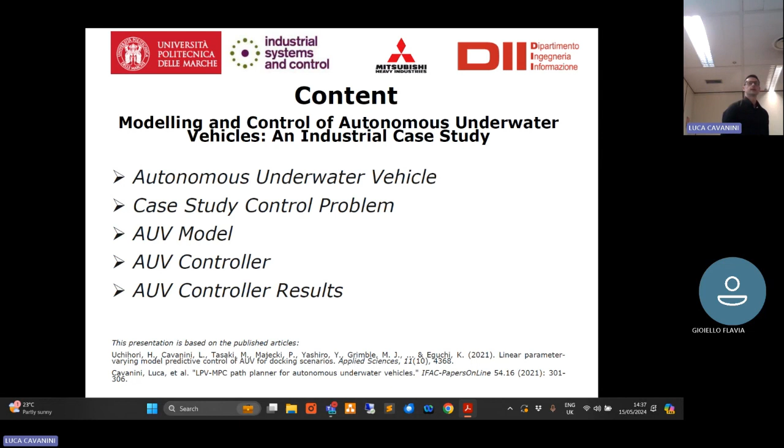This seminar is on the design of a control system for an AUV. This activity and the results and design I will present are related to work developed within Industrial System and Controls, a company in Glasgow, and Mitsubishi Heavy Industries. In our activity, the goal of our control problem is to develop a control system for an AUV aimed at performing a certain set of tasks autonomously in underwater scenarios. In particular, the vehicle shown below in this slide is used for evaluating the state of health of oil and gas tubes on the seafloor.

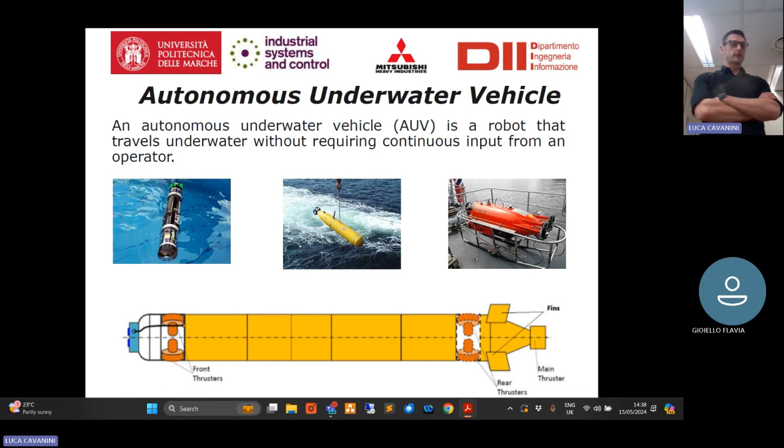This type of vehicle is used for developing and realizing different applications that require a high degree of autonomy of the robot. Our approach relates to the control problem that will be faced and discussed today: to develop this control system and a related path planner, a higher control system in the control system hierarchy, that will permit performing a particular task.

To move from the initial position to the ROV position, the vehicle will perform a set of maneuvers related to the capability to detect the position of the ROV with respect to the range of measurement of the sonar. The vehicle should correctly track the trajectory generated by the path planner to follow the different waypoints, and while moving through them, maintain the ROV, our goal position, within the angular range of the sonar.

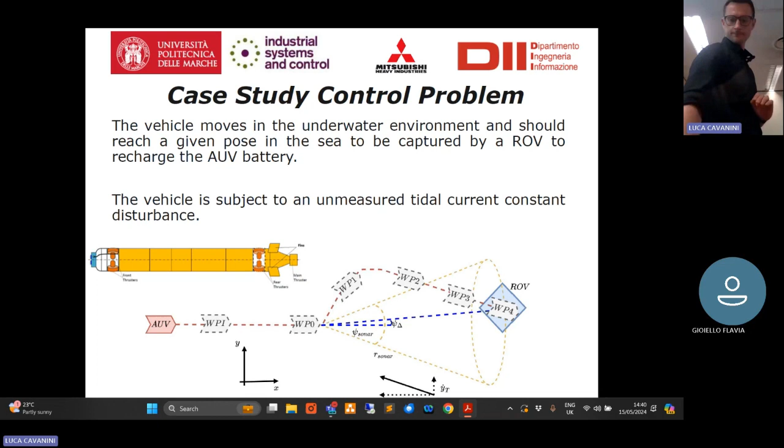So, to develop the control system aimed at driving our vehicle, we first need to study and develop a simulation model of our robot.

To develop the simulation model, we need to define three main aspects. The first is to define the reference frames characterizing our application. Then we need to model the dynamics of our system, exploiting the design framework for underwater vehicles proposed by Professor Fossen from the NTNU.

Finally, we will characterize the vehicle by including the dynamics model of our actuators, because as you have seen, our vehicle is equipped with several actuators, so it's redundant in some way, and we need to adjust the control action for different actuators to guarantee correct control performance while moving over the scenario.

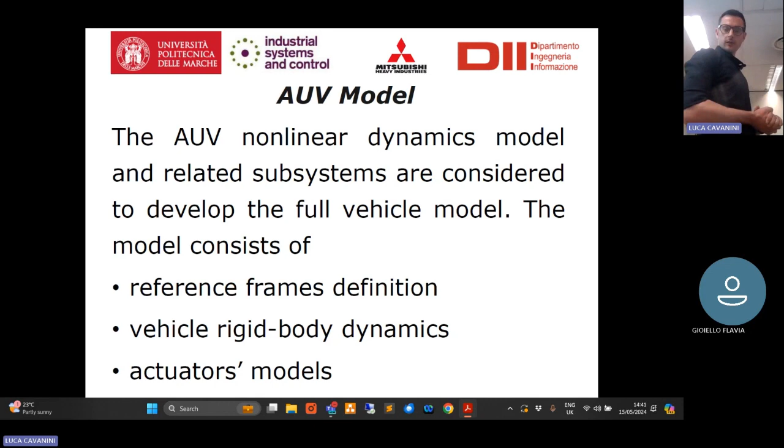So first of all, the reference frames. For marine applications, we use two reference frames. The first is the robot-based reference frame, the local reference frame used for representing angular and linear velocities of the robot. This reference frame, indicated here as the body-fixed reference frame, moves together with the robot and is related to the external reference frame by a transformation of coordinates.

The overall model of the system will merge the combination of the inertial reference frame and the local reference frame for correctly defining the pose and angular position of the robot with respect to the external one.

The signals we consider in both reference frames are the forward velocity of the robot, the lateral velocity, and the vertical velocity, with the z-axis oriented in the opposite direction with respect to the surface. The same analysis is performed for defining the external, or inertial, reference frame.

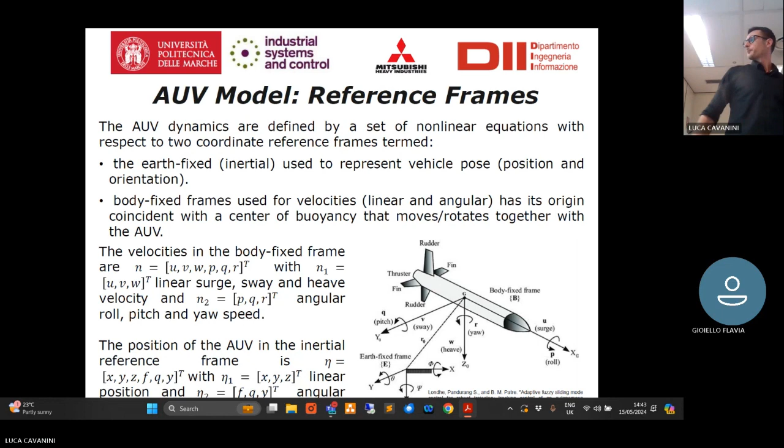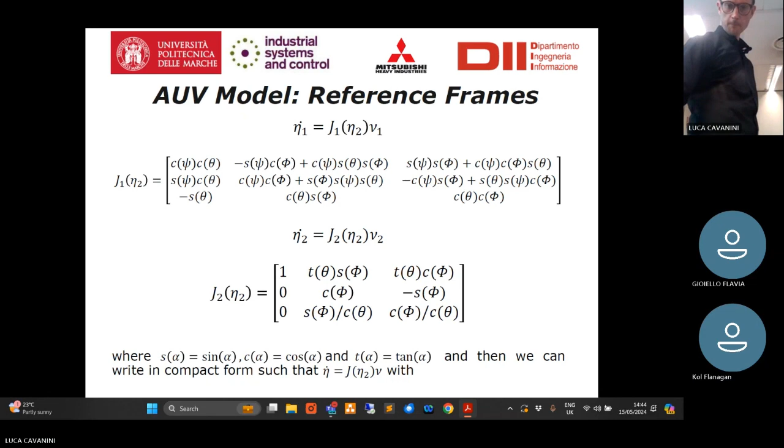This equation is characterized by the different effects we want to model to correctly represent the dynamics of our system. It includes the effect of restoring forces, which depend on the geometry of our vehicle, the added mass, strictly related to the underwater application we are considering, damping terms, Coriolis effects, and actuator forces and moments.

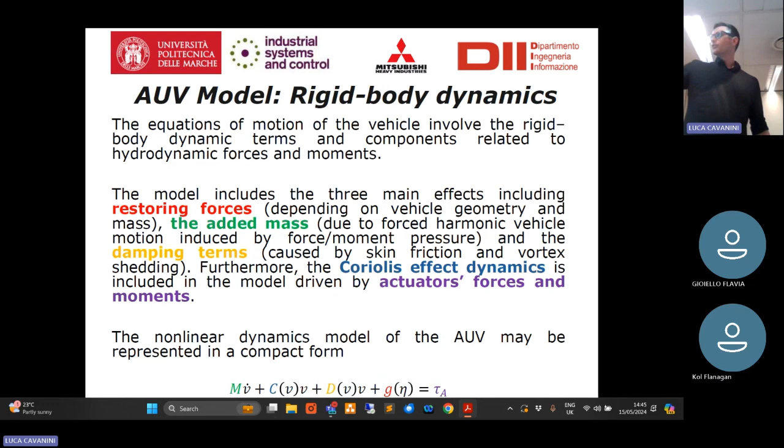This general rigid body equation is characterized by these components. M represents the mass matrix component of our equation, and this M is not only related to the mass of the vehicle, but also to the added mass, which we will discuss later.

C represents the Coriolis effects. D represents the damping effects affecting the vehicle. G corresponds to the restoring forces and moments, which includes both the gravity force that tends to move the vehicle to the seafloor, and the buoyancy that tends to move the vehicle to the surface.

As I said, we have the thrust expressed in terms of forces and moments, which is the set of actions we apply for driving the vehicle. And of course we have the set of state variables affecting each term, where v is the array of linear and angular velocities, and eta is the array of linear and angular positions.

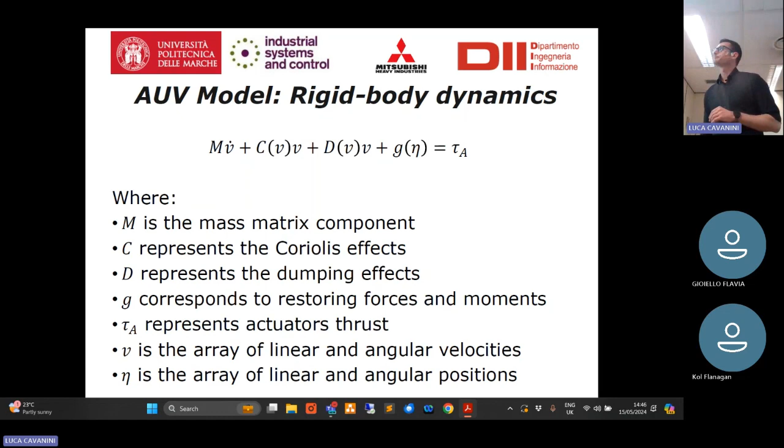First of all, the mass. The mass of underwater vehicles is characterized by two terms, following the modeling approach proposed by Professor Fossen. In this approach, we can consider the mass of the vehicle as a constant part due to the inertia of the system, so the mass of the system and its size, with respect to the center of gravity, where Rg is the position of the center of gravity of the vehicle.

This constant term is interesting for us from a control system point of view - the mass is the first term we are analyzing in the rigid body equation. It is composed of two terms: this first term is constant and is parameterized according to this representation, but it's also composed of another term indicated as MAM.

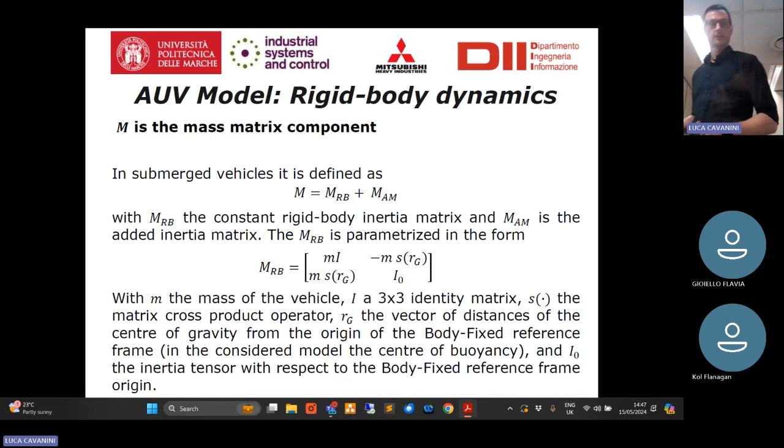This second term represents the added mass. It is the mass related to the displacement of the vehicle in the underwater scenario and to the water moved while the vehicle is moving.

To model the added mass, we can consider a set of coefficients that are typical in underwater applications and permit us to approximate the added mass by this set of constant coefficients, provided directly from, in this case, MHI for characterizing the system. So the first term characterizing the rigid body equation of our system is given by a set of constant elements.

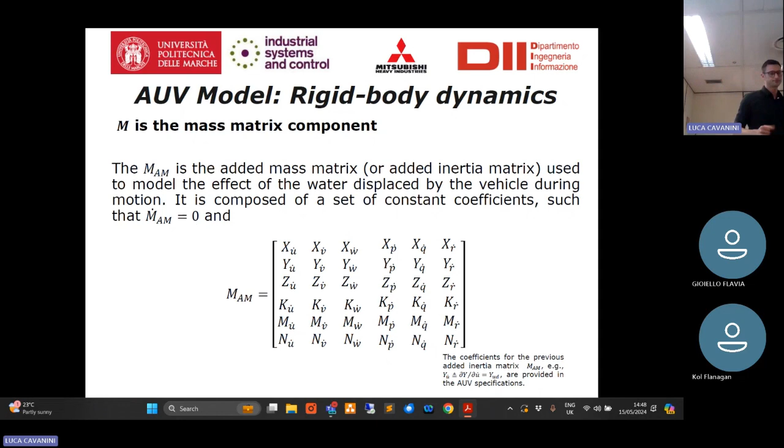The second term we are studying is the Coriolis effect. The Coriolis effect, as indicated in the previous slide, is a function of the velocities of our robot. So in this case, from a control system point of view, we are considering this C of V as a time-varying component affecting the dynamics of the system.

Also in this case, the Coriolis effect can be mapped in our model by considering two components: the Coriolis effect due to the nominal mass, and the Coriolis effect related to the added mass, as for the mass effect we have seen before. So we can model the Coriolis effect by considering these two components.

They are characterized by this skew symmetrical parameterization, and this will permit us to directly evaluate the degree of change of our C matrix with respect to the range of variation of our angular and linear speed.

An analysis like this, which permits us to evaluate the change of magnitude of the values of the Coriolis effect matrix, is useful because by evaluating the rate of change and the magnitude of this term, we can evaluate the required robustness of our control system.

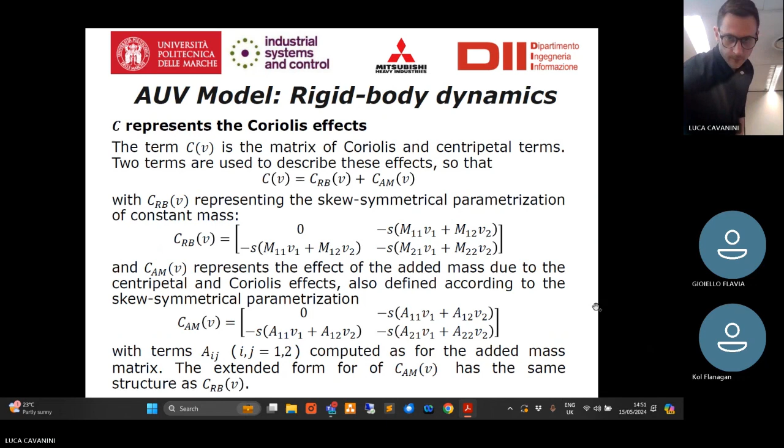Further, we have the damping effects. They are related to different effects affecting our vehicle in the underwater scenario. So in general, in marine vehicles, the damping effects are classified as potential damping, viscous damping, wave drift damping, vortex shedding, and lifting forces.

Now, certain of these components will be removed only because our vehicle is an underwater vehicle. For example, wave drift damping will be neglected in our analysis because it affects only surface vehicles.

So by the analysis and review of these different effects, based on the study of our control scenario, the damping effect will be modeled as indicated in this equation, by a set of constant terms that characterize the vehicle and are studied through finite element analysis of the hull, nonlinearly related to angular and linear velocities.

In particular, we can see that almost every term is related to the absolute value of the linear velocity times the value of the linear velocity. So these are nonlinear equations that we need to take care of and take into account while modeling the system.

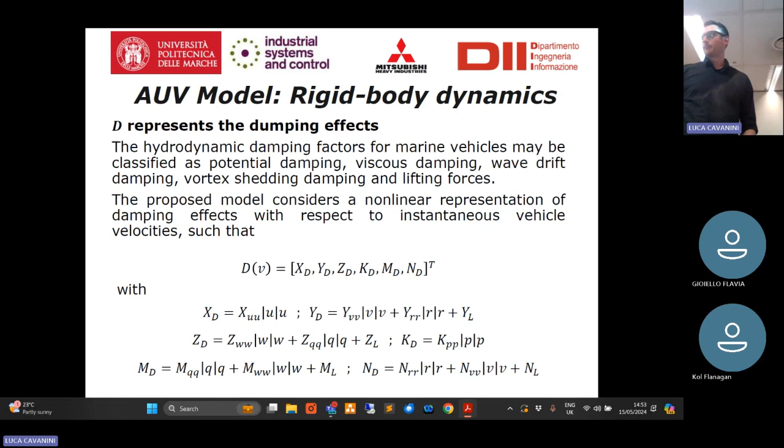Further, as I mentioned before, we have the restoring forces. Restoring forces are related to the mass of the vehicle that tends to move it toward the seafloor, and to the buoyancy that tends to move it toward the surface. Both these forces should be mapped within the vehicle model according to the position of the center of buoyancy and center of gravity of the vehicle.

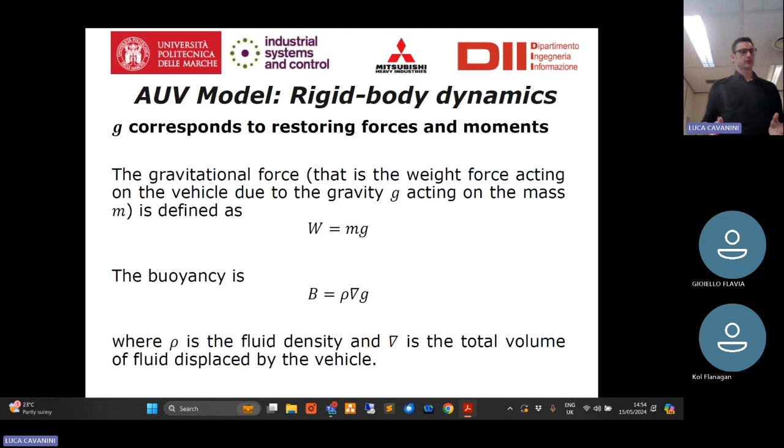This means that the center of gravity of the vehicle is related to the geometry and mass of the vehicle, and in general can differ from the center of buoyancy, because the center of buoyancy is also related to the geometry, the mass, and the distribution of mass of the vehicle—but in general, they cannot be coincident.

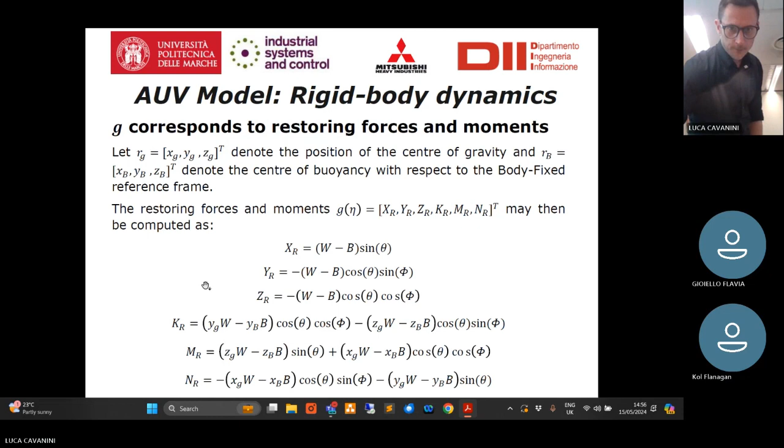So these are the four terms we are describing and modeling for emulating and studying the dynamics of our model. Now, our model should also be characterized considering the forces and moments that we define for controlling our robot.

Let's characterize the actuators to evaluate their dynamics and understand which kind of control system we need to develop, also taking into account nonlinearities and the size and position of these actuators with respect to the vessel hull.

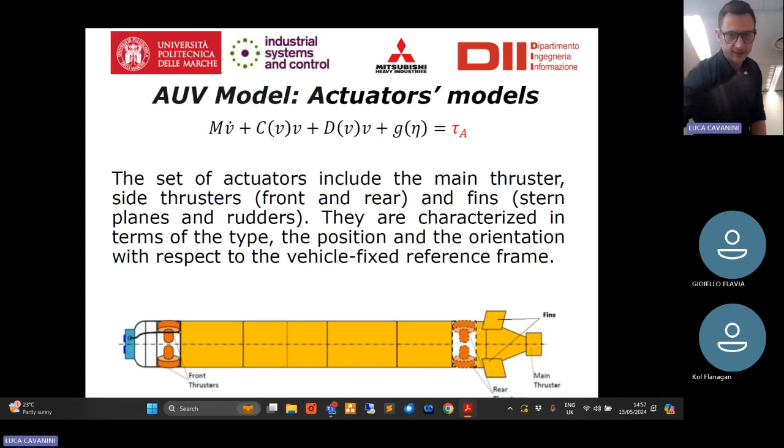First of all, the main thruster. As I said, the main thruster is placed at an extreme of the vehicle and is able to generate only forces for moving the vehicle in the forward direction. Our main thruster is characterized by this nonlinear equation describing its dynamics, with a dynamic part related to second order dynamics.

Because the thruster is for underwater application, the force generated by this thruster is also characterized by the water density, assumed constant in our application, and with respect to the control input.

Now, the control input of our thruster is limited to be within an upper bound and a lower bound, but it is also characterized by a dead zone around 0 with an offset of 400 RPM.

This is something we need to take care of while developing the control system, because the saturations and dead zone have effects on nonlinear dynamics. We need to take care to have a correct behavior.

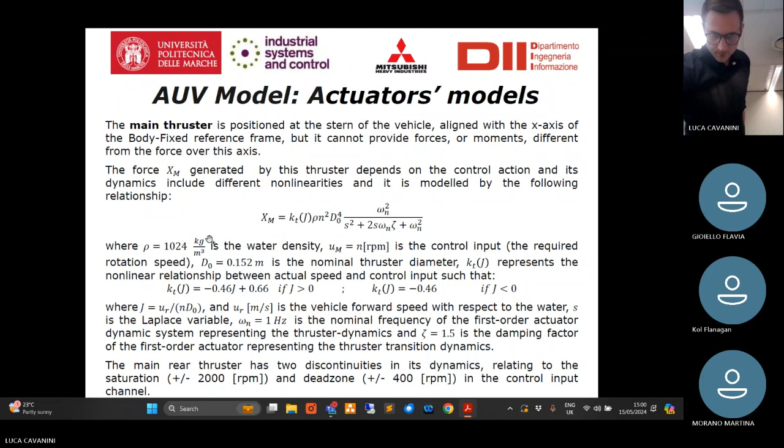Then we have fins. Fins are placed close to the main thruster, and the capability of each fin to generate a certain force and a certain moment with respect to the rigid body dynamics orientation is given by these equations.

As you can see, here you will not have the term related to the force generated with respect to the forward direction of the vehicle. This is because, due to their position on the hull, fins cannot generate a force over the forward direction of the robot. But they can be used in combination for generating different forces and moments over the other directions.

In particular, in this robot, we are able to control each fin, so each rudder and each stern plane, in combination but also individually. Here we have delta R1, delta R2 related to the angle of the rudders, and delta S1, delta S2 related to the angle of the stern planes.

An interesting aspect is related to the other effects characterizing forces and moments generated by fins, because when we drive these fins for generating a certain force or moment with respect to a certain axis, we will have also a part of the force generated that is not strictly related to the control signal driving the fins, so delta R and delta S, but related to the interaction between the fins and the environment.

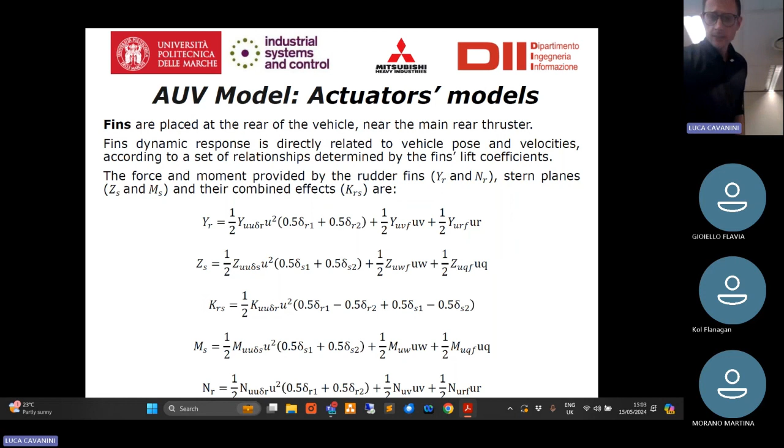This part of the force and moment generated due to the use of fins should be taken into account to correctly define the control action driving the fins for obtaining the expected forces and moments. We will see this during the control system design in a few slides.

As I said in the previous slide, we have seen forces and moments generated by fins, but fins are also characterized by a low pass dynamics. Each fin is driven as a second order system characterized by a natural frequency of 4 Hz and a damping factor of 0.7.

This means that when we define the control system for the rigid body, so for the vehicle, as we have done or will do for the main thruster, we need to also take care of the dynamics of the fins, because the effect of the change in angular position of each fin is not directly mapped into forces generated by fins, but is smoothed due to the presence of this second order dynamics characterizing the movement of the fins.

And of course, fins are also characterized by a maximum and minimum orientation. So the control action driving fins should be constrained to be between 30 and minus 30 degrees with respect to the zero position of each fin.

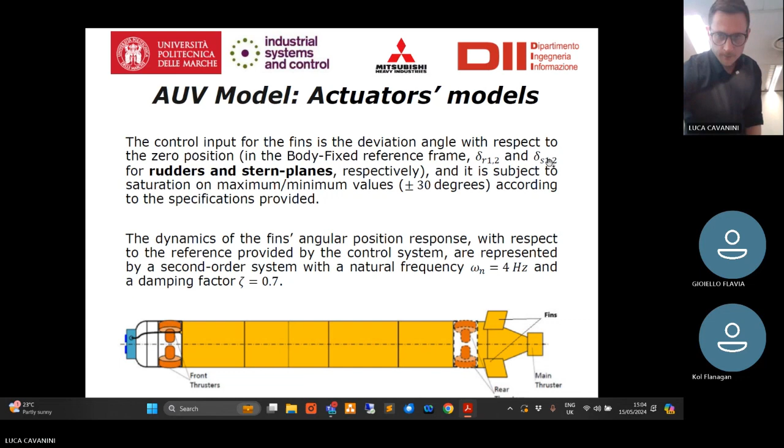As I said, we have also another set of actuators: the side thrusters. The side thrusters, characterized by specifications provided by MHI and to be used according to this specification, should be used only while the vehicle is moving at low speed, such that fins are not effective.

By using the side thruster, we are able to maintain a given position, a hovering position, in the underwater environment, or move over the environment with a limited forward speed, while guaranteeing the possibility to correctly maneuver the vehicle also when fins are not effective, because the speed is too low.

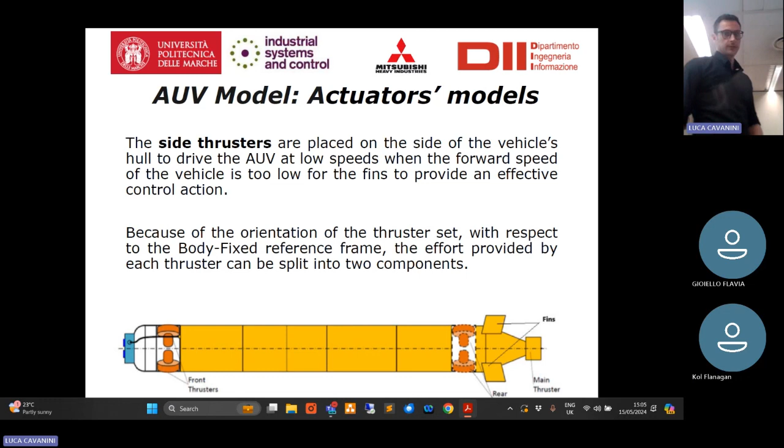The effect of different side thrusters should be mapped in the effective set of forces and moments generated by these thrusters. So here we have the so-termed allocation matrix that permits to consider which is the effect of

forces applied or generated really by each of the side thrusters with respect to its position on the vessel. Because of this, we can see the first row of this matrix is 0 because side thrusters cannot be used for generating a speed for moving in a forward direction of the robot. The second and the third row represent the capability of how we can map each force generated by each side thruster

into related forces used for moving on the lateral side or over the vertical direction of our robot. Whereas the last 3 rows indicate the capability to combine the forces generated by each side thruster to generate moments. Of course, they are related to the position of each thruster with respect to the center of mass of the vehicle. Because of this, we have this combination of d and minus d, and capital DF and minus capital DF and capital DR and minus capital DR.

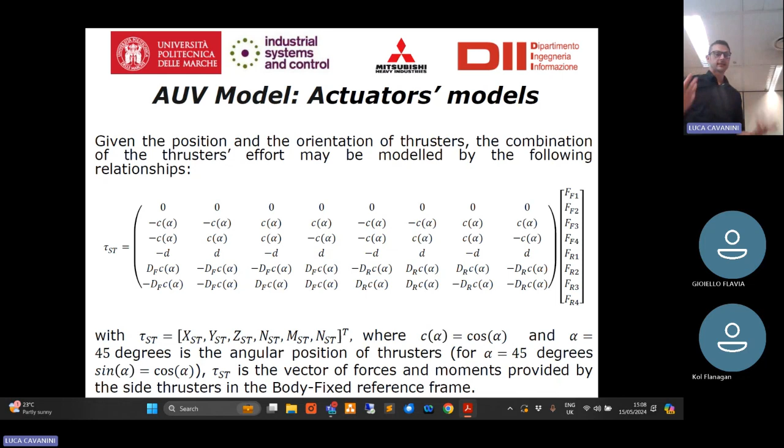But this equation permits to characterize the combination of forces generated by thrusters, but the thrusters again are dynamic systems and they are characterized by a certain dynamics. In fact, each thruster is characterized by a dynamic behavior given by the state space model. This is in continuous time.

This state space model is used as a filter for filtering the real thrust generated by each side thruster, where the real thrust, indicated with YT here, is computed with respect to the instantaneous value of the control signal driving the actuator, UT, and also the square of the control action. So again, also for this thruster, we have a nonlinear relationship we need to take care of while developing

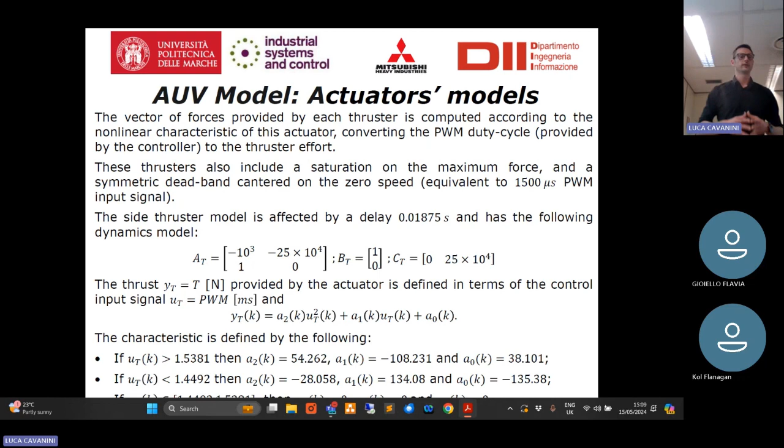the control system. In particular, we also have another nonlinearity related to the operating point of our robot. If our control action is larger than 1.5381, then the coefficients characterizing this mapping between the PWM signal and the thrust generated by the thruster will switch from one value to another. So we have a switching behavior of the thrust generated by this actuator related to the instantaneous operating condition. This is an aspect we need to take care of for generating the correct thrust while the vehicle is moving with different velocities.

Finally, we have sensors in our system. The vehicle is equipped with sensors permitting to detect, to measure really, the orientation, the position, and the angular speed and linear speed. And here we have the specifications.

In particular, we have a delay of 20 milliseconds affecting the sensors. So we can measure the position and the angular orientation and velocities of our robot with a delay of 20 milliseconds. In our application, in the final control system, the sampling time of the control system will be larger than this 20 milliseconds. So this delay does not affect the control performance because it's negligible in some way.

And further, we have a certain accuracy of sensors permitting to measure both linear velocities, but also angular velocities and angular positions, that are considered and included during the analysis of specifications and evaluated for

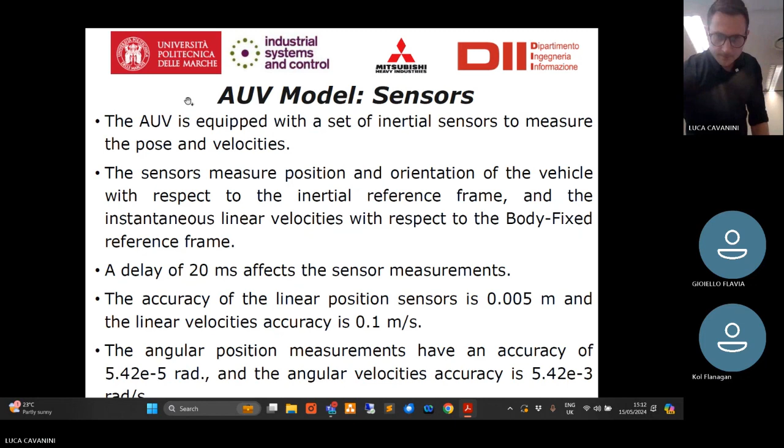As I said at the beginning, our robot moves in the underwater environment with a depth measured of more than 3 meters. That means we can neglect the wave effects, but we need to take care of tidal currents.

In providing the specifications, our tidal current is constant over all the control scenario, and it is oriented with respect to the final goal, so the final orientation of the robot when it reaches the charging point.

For including the tidal current effect within our rigid body, we can compute the difference between the actual velocity of the robot and the tidal current velocity and replace this difference directly within the rigid body equation. This will permit to correctly map the effect of this disturbance on the dynamics of our robot.

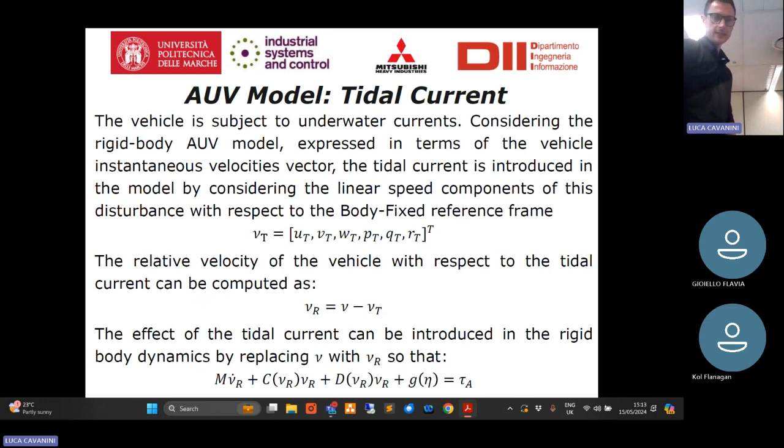As I said, the tidal current is characterized by a set of detailed specifications indicated here as three remarks. The tidal current is constant in direction and velocity, and is also irrotational, constant with a given orientation with respect to the external reference frame. Also, the tidal current affects the robot only with respect to the y and x position, so we can neglect the effect of the tidal current over the z-axis.

Which is the direction of the current? According to the provided specification, the current has the same orientation of the docking station of the AUV, and also there is an offset that will vary, but is constant over the simulation, between minus and plus 0.7045 radians. That means the current will counteract with respect to the movement of the robot while approaching the docking station with a certain offset in terms of angular position, of angular orientation of the current.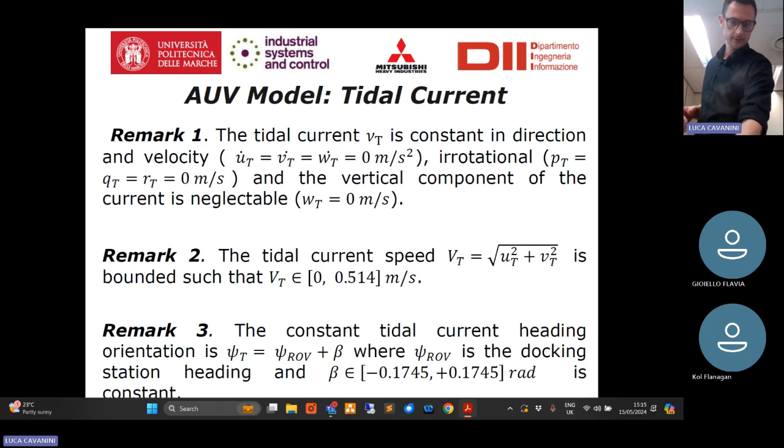So, given that, we can evaluate how to develop a control system for such a type of application, for driving this model and taking into account the different nonlinearities and actuator specifications and linearities and dynamics to define the controller.

As I mentioned before, the controller we are describing is the attitude controller. So it's the controller aimed to maintain the vehicle to a given angular position with a certain speed.

So the idea at this point is to structure our control system in a way that permits to correctly take into account the different nonlinearities and the time varying dynamics of our AUV. Here we have our AUV affected by this tidal current that is constant over the particular scenario, but in general it is not constant a priori, so it's time varying with respect to every run of the control system.

Here we have the structure of our control system. It is characterized by the presence of three main elements: the controller, the thrust allocation, and the Kalman filter.

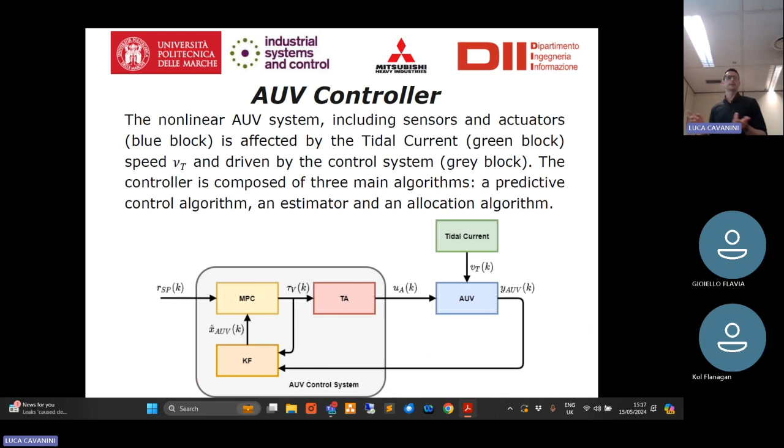The controller, the MPC, permits to compute the set of virtual forces we want to apply to the rigid body for correctly tracking the reference set point. The thrust allocation permits to map these virtual forces into the control signals driving actuators, taking into account the different nonlinearities characterizing the actuator. And further, the Kalman filter permits to estimate the state of the system to be used within MPC. Now, why are we using this structure?

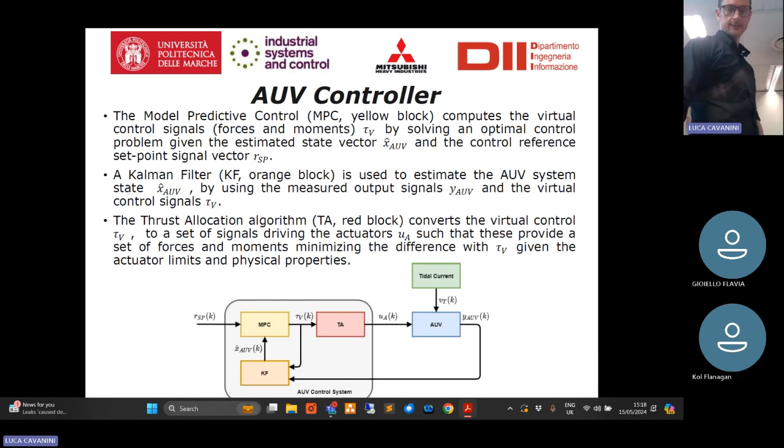In general, MPC and thrust allocation are two control systems based on optimization. So when we use MPC, we could combine the control problem of mapping the virtual forces and moments into real control action driving actuators. We can map the thrust allocation within MPC.

But there are several issues with this. The first is MPC, in this case, takes as a set of control signals, forces and moments, 6 variables. If we map the thrust allocation within MPC, we are taking into account 13 variables. So the number of optimization variables in MPC increases, and this will increase the computational complexity of the overall control system.

The second problem is related to the role of the thrust allocation, because thrusters, I mean actuators, equipped with the robot, are featured by several nonlinearities that we need to approximate, at least locally, for correctly representing the relationship between expected force or moment to be generated and control signals driving actuators. And with control signals driving actuators, I mean the angles of fins, the PWM driving side thrusters, and the control signal driving the main thruster. So different types of signals.

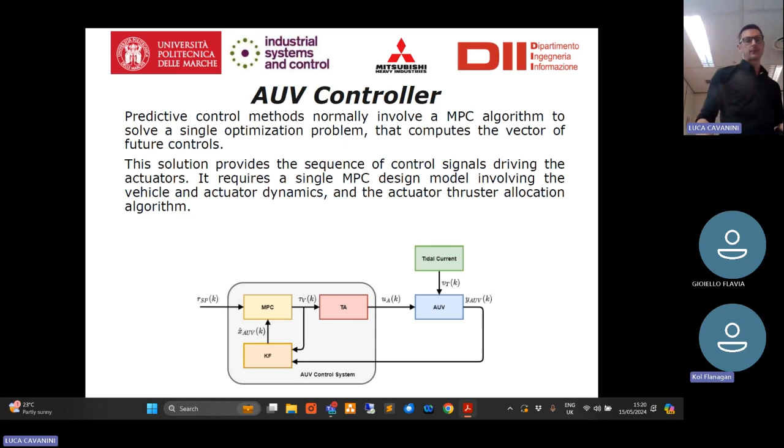Because for mapping the dynamics of these actuators in the control law, we need to take care of different operating conditions of each actuator, taking into account the previous control action or the particular operating condition of each actuator. We prefer to split the control problem, the optimization problem, into an MPC and a thrust allocation, and this permits to increase the effectivity of our mapping between virtual forces and applied control actions.

Further, there is another advantage of using MPC and thrust allocation as two different control policies, instead of a single optimization problem. It's related to the complexity of the optimization problem, because the thrust allocation takes as output the set of signals driving actuators, and MPC outputs virtual forces.

In general, in optimization, when we have a large optimization problem and we try to split it into several smaller optimization problems, these smaller problems are characterized by a total computational complexity that is lower with respect to the original MPC. So by splitting the problem into different optimization problems, we are reducing the overall computational burden required for computing the overall control system.

Of course, by splitting the optimization problem this way, we are also accepting a certain suboptimality of the solution. But this is acceptable because the approach we are using for defining the MPC and the thrust allocation is suboptimal, but effective enough and simple enough to run on the prescribed control board.

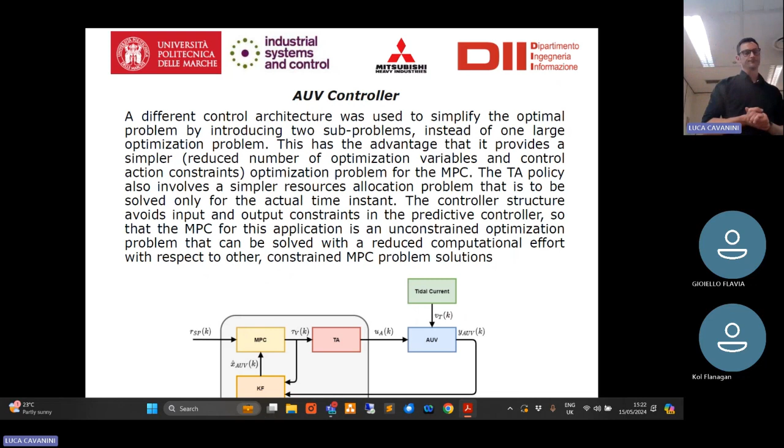In particular, we start with the MPC, the Model Predictive Controller. For developing the MPC for this particular application, we consider applying the linear parameter varying modeling approach. Why? Because by casting a nonlinear model as an LPV model, we are able to formulate our predictive controller in a quasi-linear form. The linear parameter varying model predictive control will be comparable in terms of computational complexity to the linear MPC, when the MPC is characterized by a linear time invariant system.

This has the advantage of simplifying the control problem and the computational complexity of the overall control system, but of course we increase the computational complexity a bit with respect to the linear MPC case, because at each time step we need to rebuild the whole set of matrices characterizing the model to be controlled, and then rebuild the QP problem characterizing our MPC. But we tested it, and the approximation is effective enough, also considering the sampling time and the dynamics of our system.

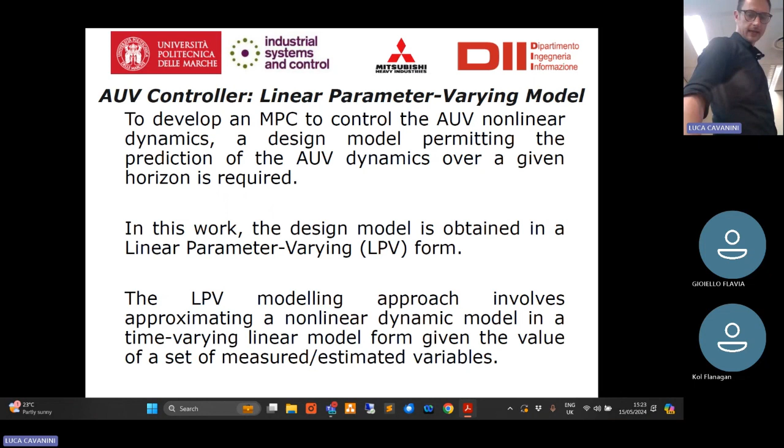So what we have done is go from the original rigid body equation to a state space form that is suitable for developing the LPV MPC.

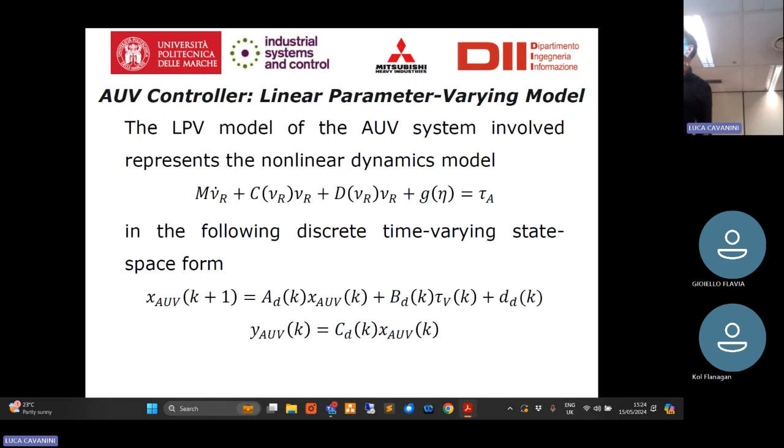This state space form considers a set of state variables indicated here, and we have as the state space vector the set of linear and angular position of the robot in the inertial reference frame, and the linear and angular velocities of the robot with respect to the local reference frame.

The set of measured outputs is related to the measured positions and velocities, measured because they are provided by sensors, so they are affected by noise, and the set of virtual forces driving the rigid body dynamics.

This means that for developing the MPC, we are neglecting the presence of actuators, and we are considering controlling directly the rigid body by applying a set of forces. The output computed by the MPC will be represented by these forces and moments.

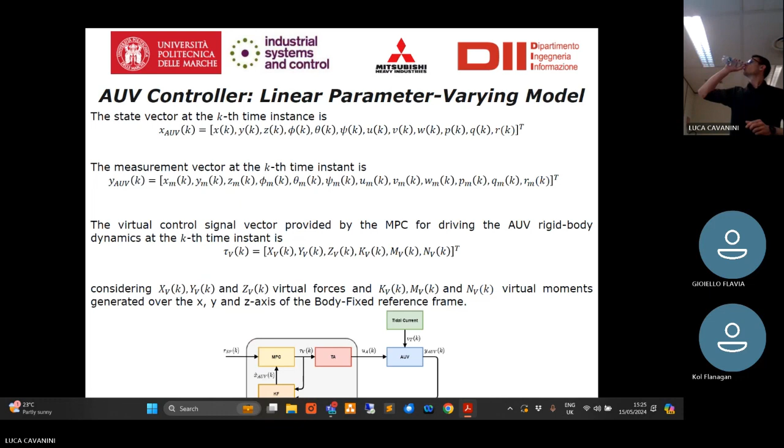So, starting from the red equation, there is the rigid body equation. We cast it in a state space form, in a time varying state space form, where A, B, C are the well-known state space matrices, and D is the disturbance matrix related to the effect of buoyancy and gravity on the vehicle.

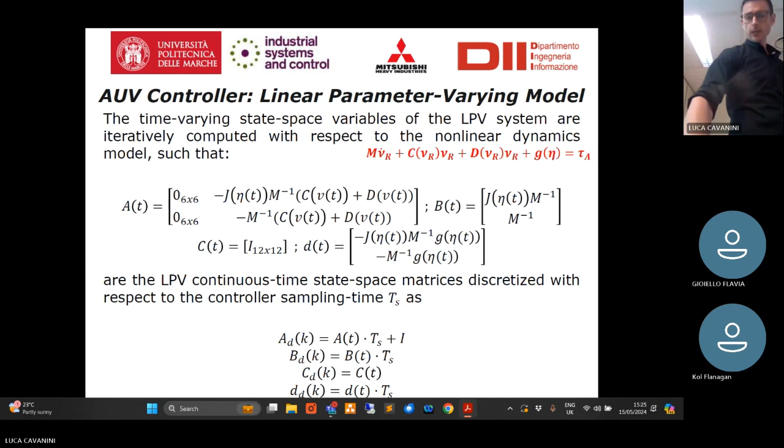So we moved from a continuous time domain to a discrete time domain by the well-known Euler discretization method. But for defining the LPV model, formally, we need to define a set of scheduling parameters. These scheduling parameters for us are directly the set of variables defining the state of the model. So our LPV model is really a state-dependent model where the nonlinearities are related to the dynamics of the state. So the scheduling parameters are related to the actual behavior of our vehicle.

Because of this, our LPV model, which varies at each time step, is parameterized and customized, and is used for developing and rebuilding the MPC at each iteration based on the estimated state variables provided by the Kalman filter.

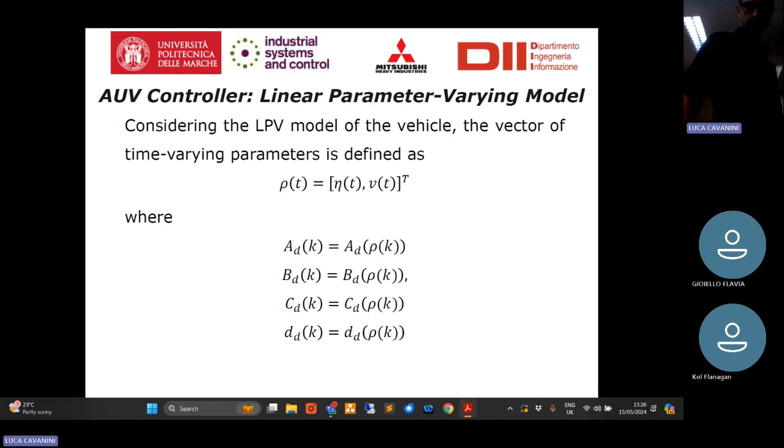So, given the previous LPV model, we can develop our MPC. Our MPC is formulated as an optimization problem with respect to the control action. Here we have the baseline formulation of the MPC we applied to this control problem. So we are weighting the rate of change of the control action, that is, the rate of change of forces and moments, and also we are weighting the tracking error between the controlled output variables and the reference variables.

This is formulated with respect to our instantaneous value of the LPV model, and we also include a set of constraints for limiting the performance of the vehicle and to guarantee the performance of the control action defined by the controller.

So we defined a convex set of constraints for the rate of change of the virtual forces and moments computed by the MPC, a convex set of constraints related to the magnitude of these forces and moments, and also a convex set of constraints representing the bounds related to the controlled variables.

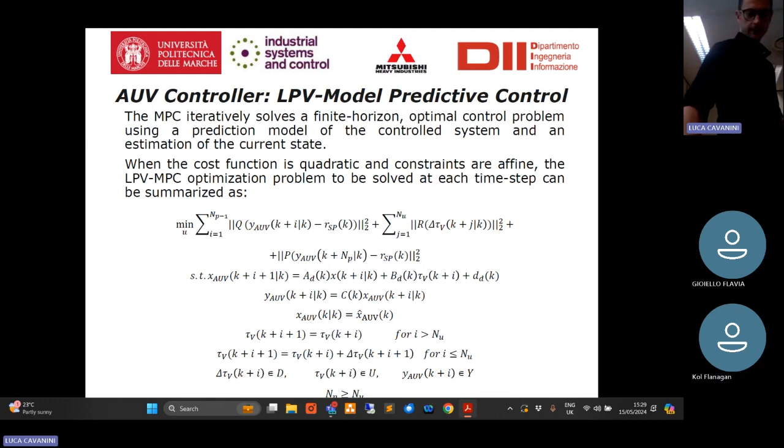Here we have the explanation of the well-known calibration terms of an MPC: the set point, the predicted output, the weight matrices weighting the control action, rate of change, and the tracking error with respect to the reference signals, and the prediction and control horizons, and the different sets.

Note that in our application, and we will see this also in the following when we have the numerical values of these tuning parameters, we considered maintaining constant the LPV model over all the prediction horizon. This is because in our application, the LPV MPC considers as scheduling parameters the variables characterizing the state of the model. So we are not directly able to predict the future dynamics of the system and use the predicted scheduling parameters to update the prediction model within the MPC.

So we prefer to use a constant LTI model, locally linearized with respect to the nonlinear model, and then use it over all the prediction horizon, even if the prediction loses its effectiveness due to this local linearization approach.

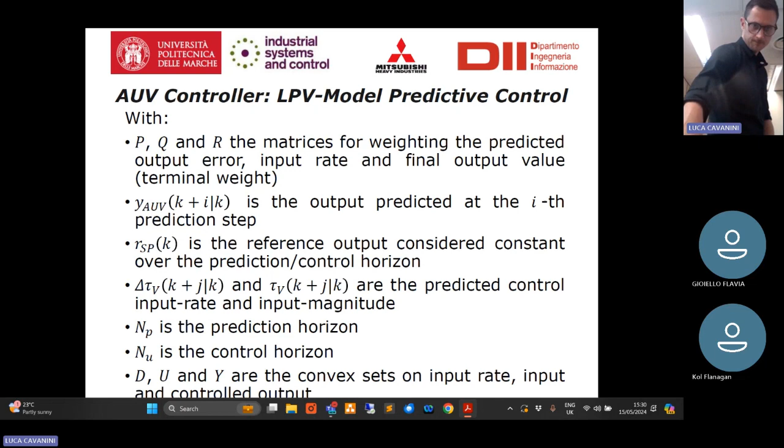And this is essentially what I said before. On one side, we split the control problem between MPC and the thrust allocation for reducing the complexity of the MPC and for having a formulation of the thrust allocation that is more effective and less computationally expensive with respect to including the actuators model within the MPC. This introduces a suboptimality with respect to the ideal case.

And in the ideal case, we would be using nonlinear MPC, but we did not apply nonlinear MPC because it is too computationally expensive with respect to our quasi-linear MPC. But the advantage is also related to the possibility to obtain a truly convex optimization problem. This means by reducing the complexity of the MPC through linearization, we introduce a suboptimality, but this can be accepted in terms of final performance because the final controller we achieved is simple enough to be executed online on the particular application.

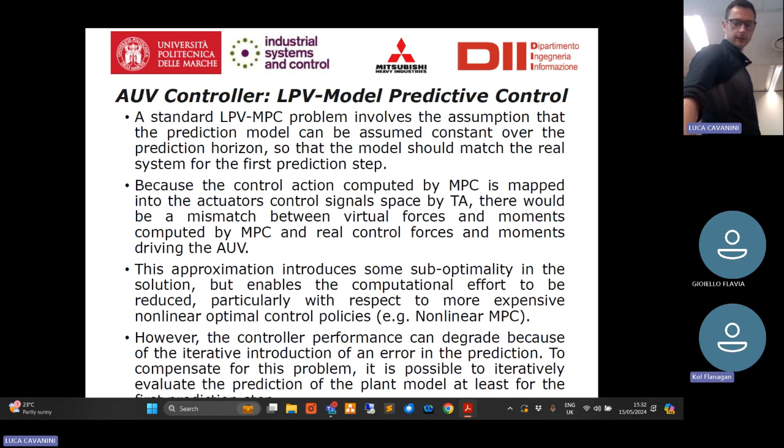So there is, as usual in MPC, always this trade-off between computational complexity and effectiveness of the model. By using this LPV approach, we are in this gray area, but the performance confirmed we can apply this type of control design to this complex problem to achieve the expected performances.

Further, there is another aspect. The thrust allocation is able to map the control action from the MPC to the control action for actuators. The problem is when we use thrust allocation, we are approximating this mapping, which is nonlinear, with a quasi-linear mapping, so we are including some error in the mapping. So the idea is to evaluate the mismatch between the real case and the linearized case by evaluating the expected behavior of the system one step ahead and comparing it with the estimated state.

So we included a modification in the MPC for taking into account the expected prediction error due to the wrong mapping that will be performed by the thrust allocation. This is computed as the estimation prediction error, given by the estimated actual state and the state achieved from the previous step's estimated state and the evolution of the system driven by the nominal virtual forces, τV(k-1). The difference between these terms provides the expected estimation prediction error.

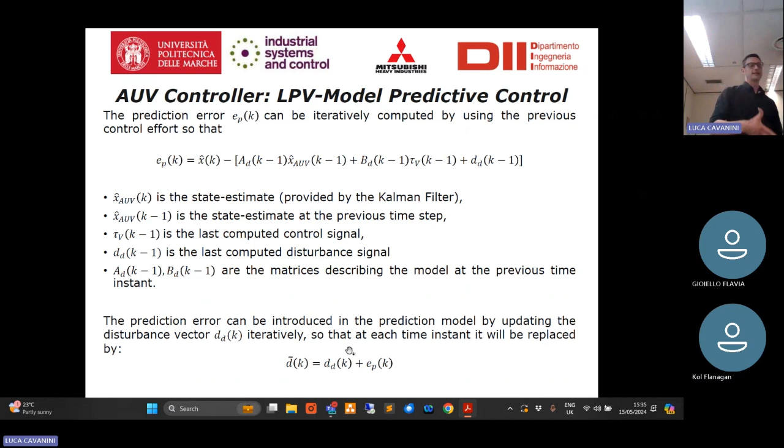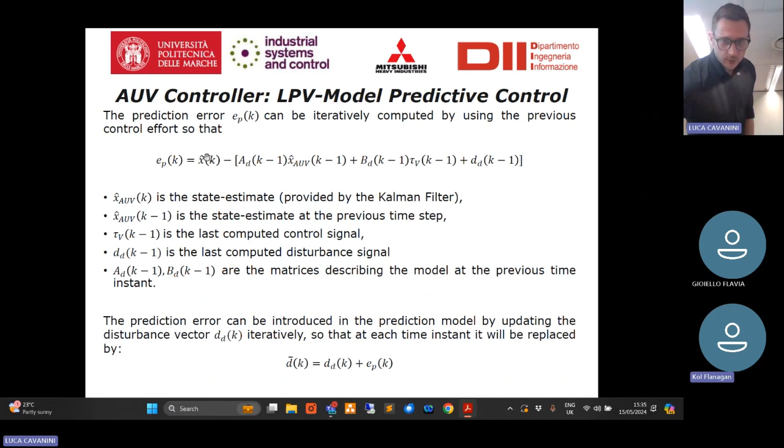And this prediction error was included within the MPC law by adjusting the value of the disturbance vector representing the nonlinear effects affecting the vehicle in the underwater scenario. Because of this, we updated at each iteration this disturbance vector with respect to the one given from the rigid body dynamics, which has been updated by including this prediction error due to the mismatch between the applied control effort and the expected control effort, where the expected control effort is the output of the MPC and the applied control effort is what we actually achieved for obtaining the actual state of the vehicle, X actual.

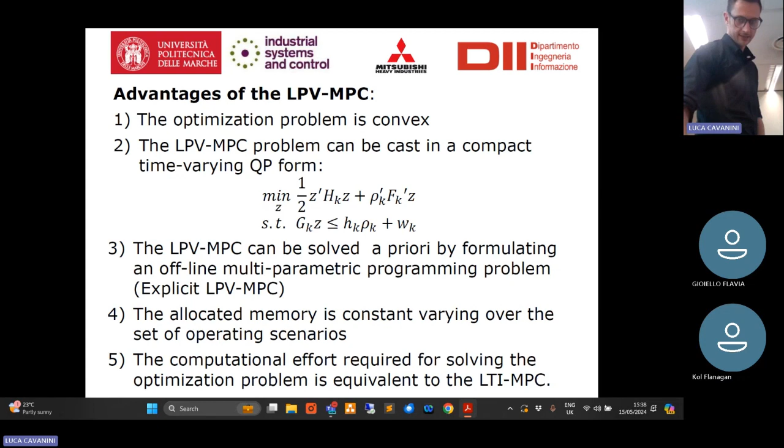Disadvantages given by MPC in the LPV form are listed here. We cannot always map with box constraints, so maximum and minimum bounds on variables. We cannot map in this form the real constraints characterizing our system. For example, again, actuators: our actuator has some dead zone, and dead zones are non-convex functions that in some way we would want to include within the MPC while maintaining convexity.

Further, another problem is given by the LPV approach, because, as I said, in our application, the LPV model is considered constant over a prediction horizon. In principle, we could update it with the predicted scheduling variables. This is a limit, because in this case, the scheduling variables cannot be predicted effectively due to the nature of these variables, so this introduces a certain suboptimality in the LPV MPC with respect to the nonlinear case.

Of course, and this is what I said in the slide before at point 5, the computational time is comparable for solving the LTI MPC and the LPV MPC, but we need to take care about the time required for rebuilding the state-space model and related QP matrices. This will be expensive in certain applications depending on the tuning parameter and the size of the model.

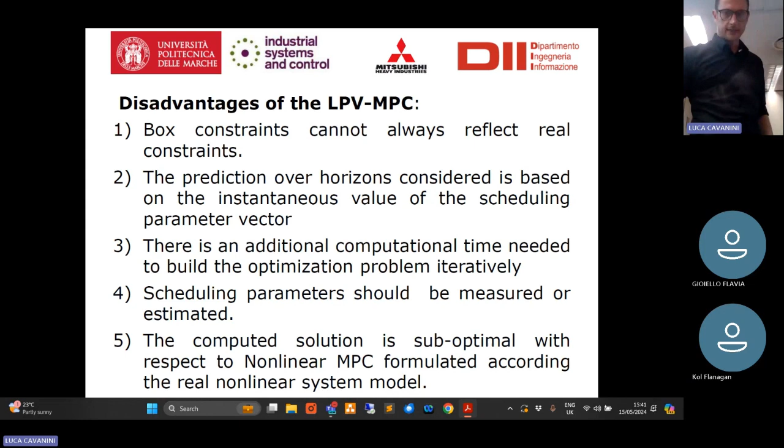Further, of course, the real performance of LPV MPC should be evaluated with respect to nonlinear MPC, because in nonlinear MPC we are considering the nonlinear model and the real nonlinear constraints characterizing the system, while in LPV MPC we are approximating everything to a convex form. But this is not an issue because we evaluate the computational complexity and other factors affecting the different MPC solutions, and the nonlinear MPC has been considered a non-feasible solution for this problem.

This has been the MPC, a controller trained and calibrated with respect to the rigid body dynamics of the system. Then we need, in some way, to map the set of virtual forces and moments to the real set of control signals driving actuators. Because of this, we included the thrust allocation.

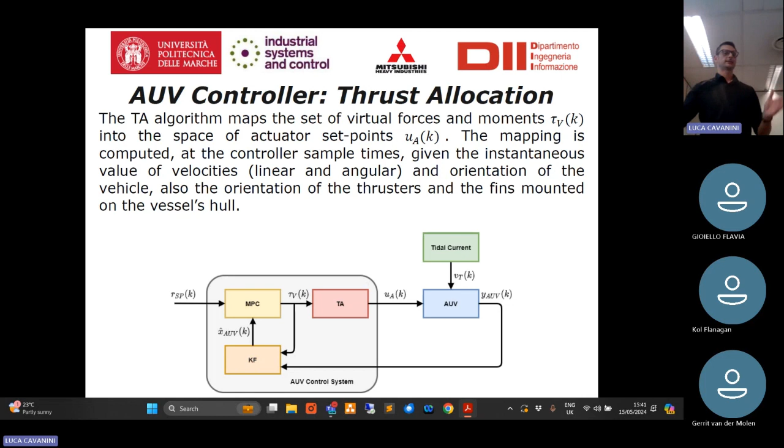The thrust allocation is formulated again as a constrained optimization problem, in this case as a quadratic programming problem, where we want to constrain the set of signals driving actuators with respect to their bounds, so UA minimum and UA maximum, and we want to satisfy the condition that tau of v equals g of t times u of a. So we want the instantaneous linear combination of actuator control signals to provide a combined effort in terms of forces and moments that maps exactly the virtual forces and moments generated by the MPC.

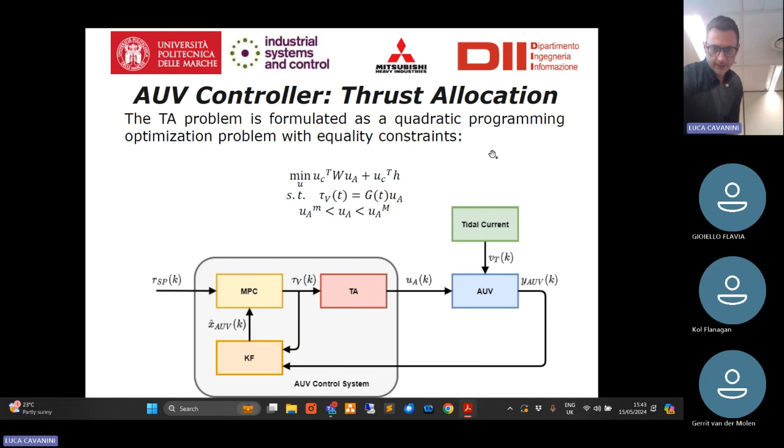The problem is formulated as a QP because the Hessian here is the matrix W, which contains weights permitting to limit the magnitude of the control action driving actuators, whereas the linear term, UC transpose H, permits to weight the mismatch between the expected thrust generated, so the expected force and moment generated by combined actuators, and the signal generated by the MPC. So the linear term represents the capability to track and satisfy the force and moment demand required by the MPC with the available actuators.

So this is the explanation of our thrust allocation algorithm. Our optimization vector is the set of signals driving each actuator: the main thruster, rudders, side thrusters, stern planes (fins), and rear and front side thruster control signals.

For each of these control signals used for driving actuators, we have maximum and minimum values in terms of magnitude. These values are characterized by taking into account some nonlinear dynamics of the actuator, such as rate limiters. So these values are not directly used as maximum or minimum magnitude, but are also characterized for representing the maximum and minimum rate of change.

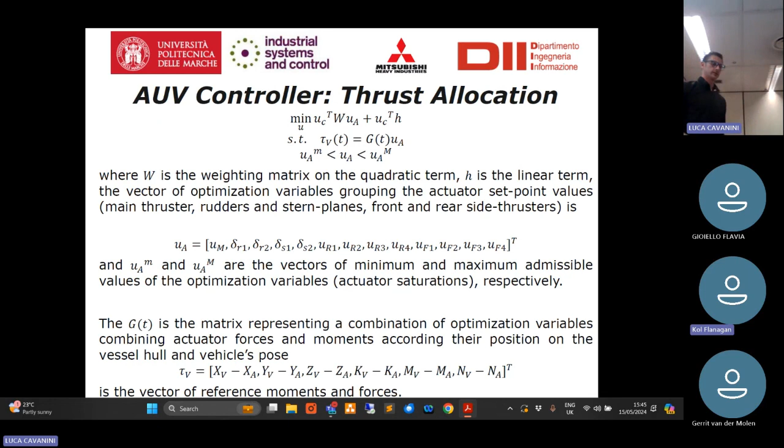There is also another interesting aspect related to the reference forces and moments that are the output of the MPC to be tracked by the thrust allocation, because XV, YV, ZV, KV, MV, and NV in the last equation represent the output of the MPC, whereas XA, YA, ZA, and so on represent the additive effects due to actuators. What does it mean? As you remember...

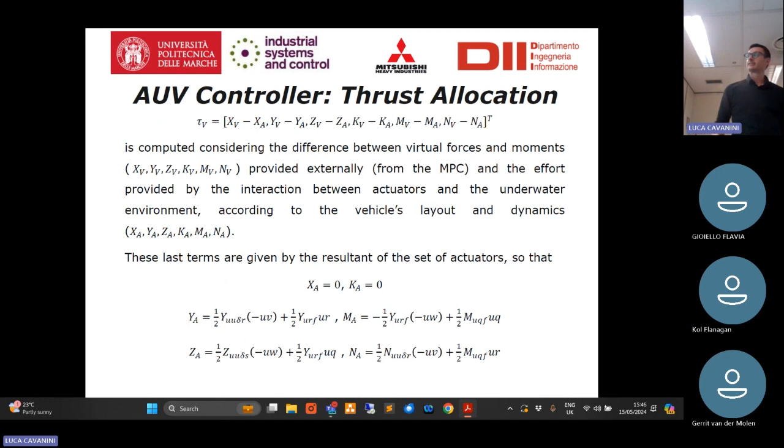These are the equations given by the model of forces and moments generated by fins. Only part of this equation, part of these forces and moments, are related to the control action on the actuators, whereas these other terms represent the effect, the side effects, of thrusters in contact with the water.

That means tau v, the virtual forces to be tracked, are composed of the yellow terms related to the forces generated by the MPC, and the red term, which represents disturbances. We need to take care to ensure that the control action driving an actuator provides the correct part of force and moment to be combined in the thrust allocation. Because of this, we are scaling out a certain offset due to these side effects of thrusters for achieving correct control performance.

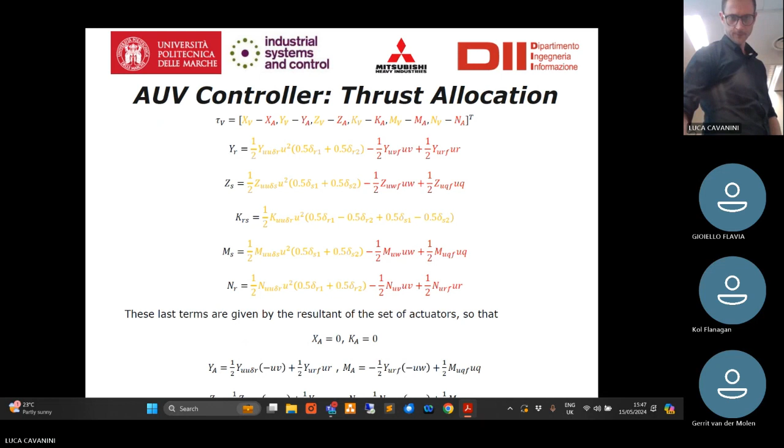The rest of the thrust allocation matrix problem is characterized by the configuration matrix of the allocation matrix. This is a time-varying matrix because the vehicle is moving over time and actuators are moving in terms of angular orientation with the vehicle. So this allocation matrix is used for instantaneously mapping our control action driving the actuator into the related forces and moments.

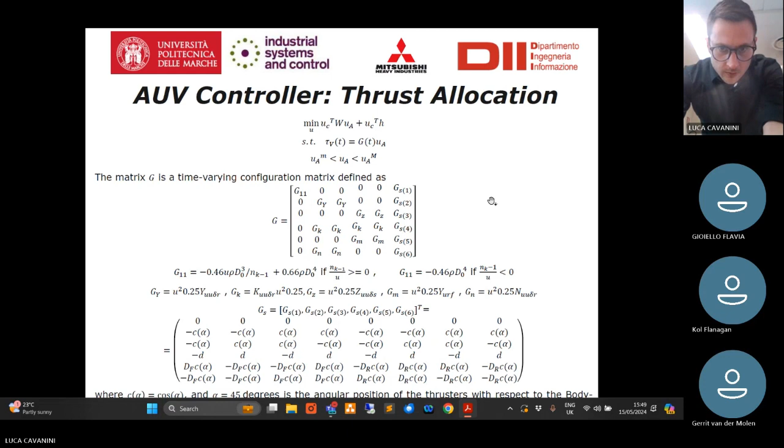And this is also something I mentioned before: for each of the limit values describing constraints on the control action driving actuators, we can replace these bound values with the updated value of the rate of change, because certain actuators can move with a certain speed, so we can achieve a certain magnitude of the force to be generated based on the internal dynamics of the actuator. So we need to constrain also the rate of change of the control signal driving these actuators for correctly mapping the effect of this local actuator dynamics into our control law.

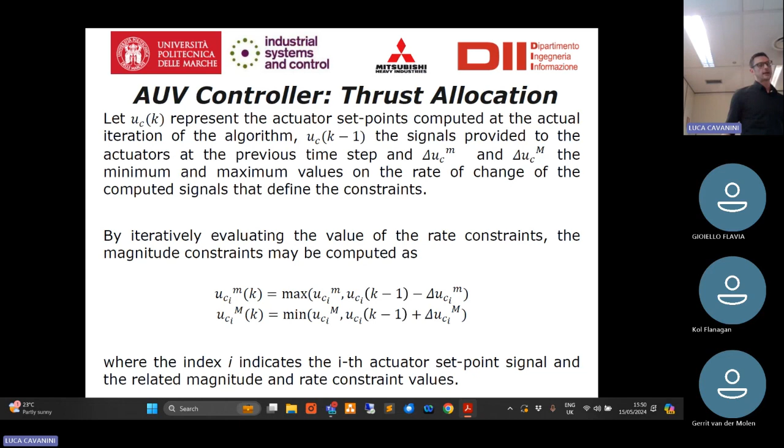The last part of our control system is the Kalman filter. As you know, the Kalman filter is well known because it permits obtaining certain performances in quasi-linear cases. In our approach, we considered an LPV Kalman filter.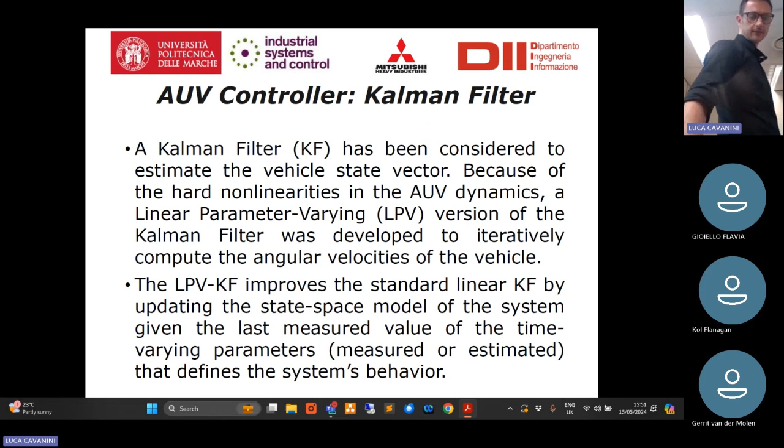There is an extension of the extended Kalman filter to the linear parameter varying modeling case, and this permitted to correctly define and estimate the different variables describing the position, linear and angular position of the vehicle, and also the different velocities, linear and angular velocities with respect to the local reference frame.

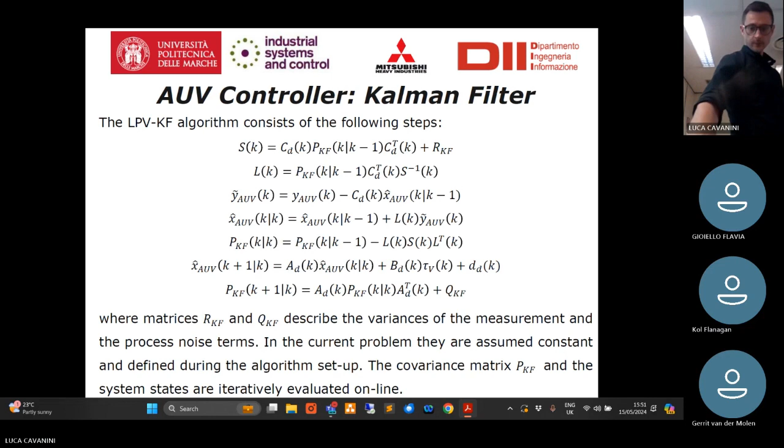So let's see some results. For testing the algorithm, we consider this set of tuning parameters, in particular for the MPC. It's interesting to know that in our approach, we considered an LPV MPC, so the space state model is constant over the overall prediction and control horizon. For our approach, we considered a control horizon of 1.

So only the first time instance is considered for defining the control signal, whereas the prediction horizon has been considered of 10. Here it's not reported, but in our application we included a set of bounds on maximum forces and moments, virtual forces and moments to be computed by the MPC, but these bounds are safety bounds because they are opposed to the nominal maximum thrust each actuator can provide - so the maximum and minimum nominal forces and moments each actuator, the set of actuators, can provide.

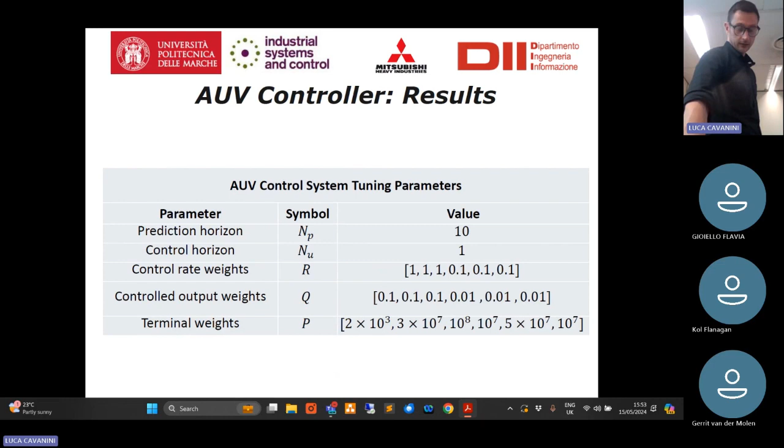So these are safety bounds to stay within the feasible area of operations of actuators. For testing the control system, evaluating the correctness of the developed control system for the rigid body dynamics and actuators, we considered...

Two tests initially: a test without the tidal current, so in nominal operating condition where the vehicle is not affected by any disturbance, and a max current test in which the vehicle is moving in the underwater scenario characterized by a current speed that is the maximum with respect to our specification, so 0.5 meters per second, and also the angular orientation of the current with respect to the docking position is the maximum value, so minus 0.1745 radians.

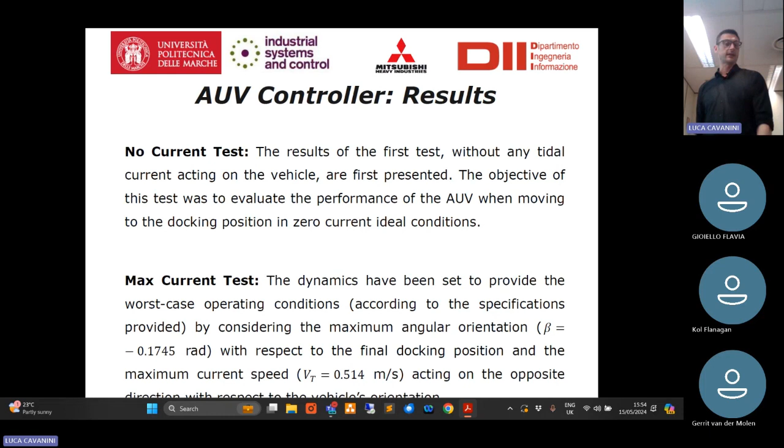And so we can see the performances of this. As you can see on the left, we can see the performance of our system in case of no current. From this, we can see that the system is able to track our reference signals. In this case, we have a set of steps and a set of constant values for the position of the vehicle and for the orientation of the vehicle.

But we can observe that both the angle theta and the vertical position of the robot are not correctly tracked by the control system. This is due to the mismatch between the model of actuators used within the control system and the real behavior of actuators, because this offset between theta and the reference signal, and here the offset between zeta and the reference signal, is due to the dead zone affecting side thrusters, because in this scenario the vehicle is moving at slow speed, so the fins are not so effective to generate forces and moments.

Because of this, we need to use side thrusters to stabilize the vehicle in hovering. The problem is related to the dead zone, so the MPC - the thrust allocation - cannot correctly map the set of forces and moments to be generated by the MPC within the space of control actions of the actuators.

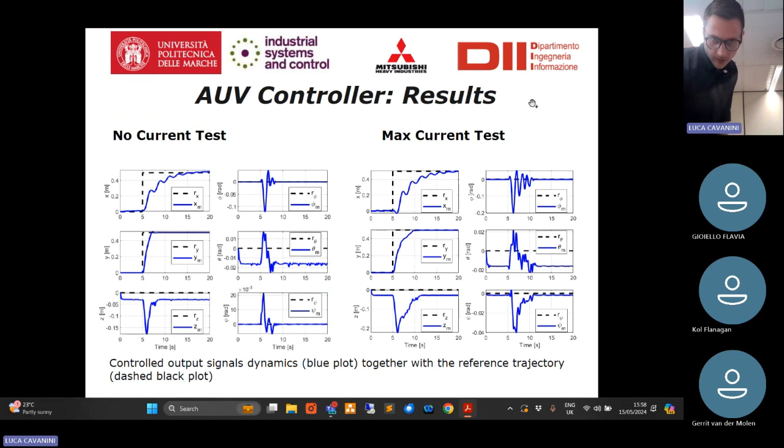If we take a look at the control actuators' control actions, we can see the effect of the dead zone.

Here we have on the left the no current test, on the right the max current test. We can see there are several oscillations of the reference signal driving the main thruster within the dead zone. These oscillations, pretty evident in both tests, represent instances when the thruster is not activated, because the policy maintains the thruster off while the control action is within the dead zone. So essentially the main thruster is used only when the blue lines go below or above the values of the dead zone.

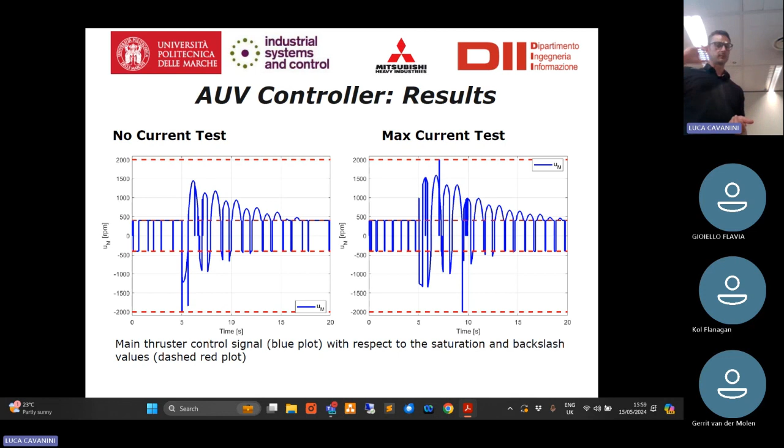This oscillation in the middle does not affect the behavior of our actuator, and this would also increase the lifetime of the actuator, because we avoid the case in which it jumps from one direction to another within the dead zone, which would stress the motor more and reduce the lifetime of the system.

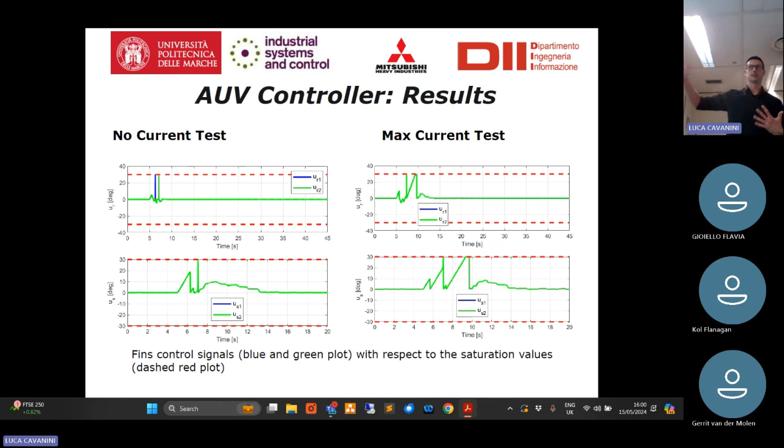These are the results for the fins: rudders on the top figure and stern planes on the bottom. As you can see, in our scenario we are moving with limited forward velocity, so fins are not really effective. For the major part of this scenario, fins are maintained at the zero position, and only in the max current test are the stern planes used and moved to the maximum angular position. But the effect of these actuators is limited in this scenario because the speed is small, so it's expected to stay close to zero or go to the maximum, since the maximum has some effect on the dynamics of the system, otherwise it stays at zero.

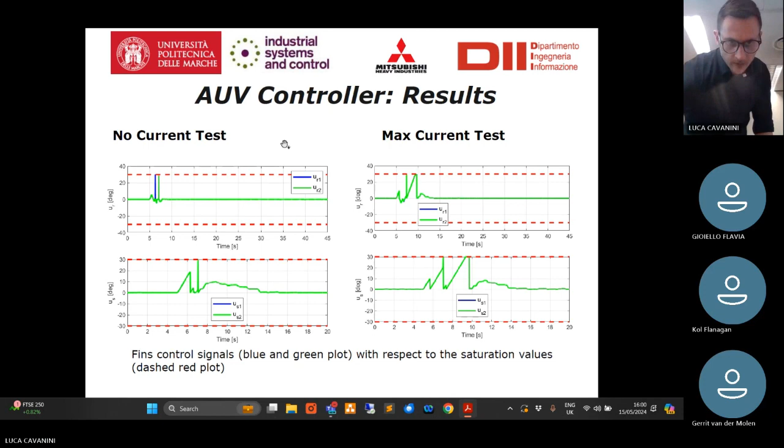Maybe I didn't mention this before, but the vehicle has positive buoyancy. It means if the vehicle is left in the water without any actuator, it will move to the surface. So the goal of the side thruster is not to generate thrust for moving the vehicle to the surface, but to generate thrust for maintaining the vehicle at a given depth.

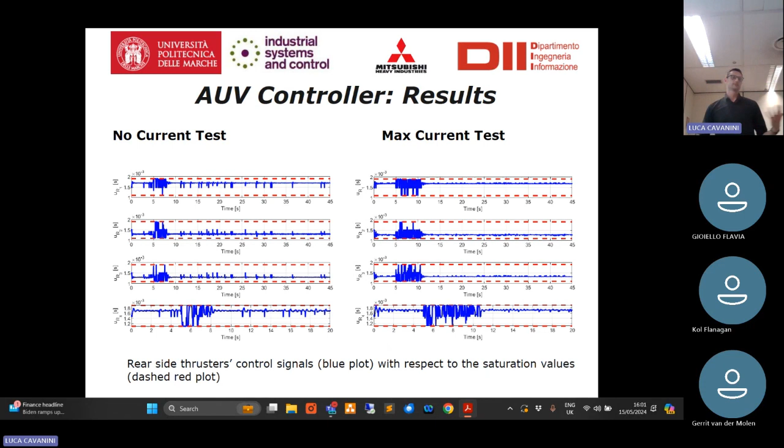The results for the rear side thruster are more or less the same, because the previous one was the thruster on the front of the vehicle. These are on the backward of the vehicle, so their behavior should be more or less equivalent for maintaining both the depth and the angular orientation, in particular the pitch.

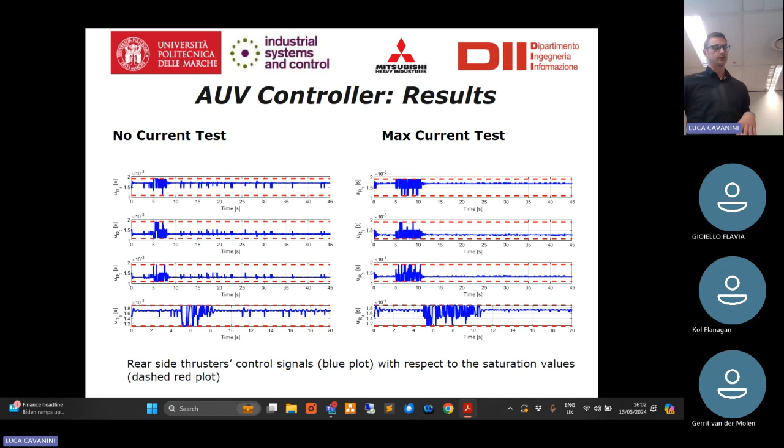The system has been developed and applied to the Mitsubishi Naminow-D vehicle. This vehicle was tested, 3 years ago, in a water tank in Japan, and was equipped with a set of sensors and actuators reflecting the layout of the model indicated by MHI. I cannot show the water tank performance of the system because of limits in diffusion of certain information.

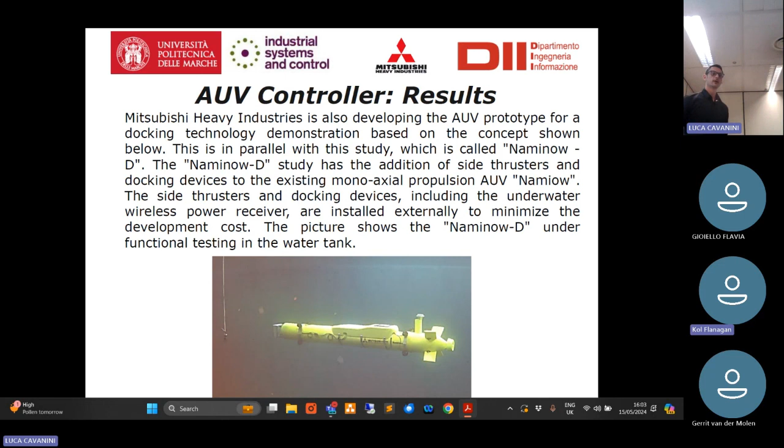The performances achieved on the real system validated the performance of our simulated system. So we have positive feedback on the design of this low-level controller, or attitude controller, for this type of vehicle.

This was the first seminar on modeling and control of AUV, an industrial case study, based on an activity that involved Industrial Systems and Control and Mitsubishi Heavy Industries.

In the next seminar, next week, we will discuss the design and development of the upper level control system of this vehicle, the path planner. We will see how we developed a path planner based on model predictive control that permitted us to correctly perform the initially indicated task: moving the vehicle over a set of operating points while maintaining the goal position and orientation within the range of measurement of our sonar, and also taking into account the effect of tidal current for adjusting the trajectory and reducing power consumption due to the use of actuators.